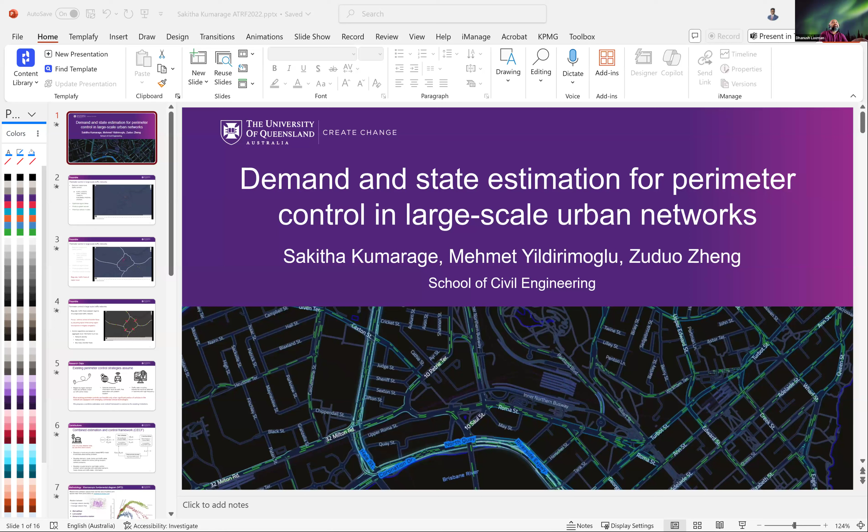Right. Can you see my screen? Not in the presenter mode. We could see your presentation. All right. I think it's correct now.

So today I'm going to talk about one of the components of my PhD, where my PhD is mainly focused on demand estimation for large-scale traffic networks. In this PhD, I focused on one component for today's presentation, which is demand and state estimation for perimeter controls in large-scale urban networks, which I will go into in detail soon. This is a combined work of myself and my supervisors, Dr. Mehmet Yildirimoglu and Professor Zuduo Zheng.

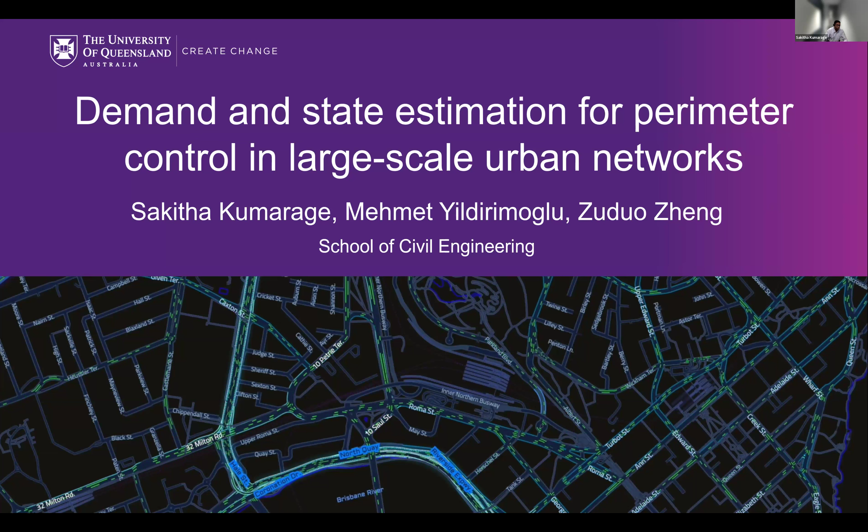So we are talking about controlling traffic in a large-scale traffic network. Let's say, as shown in this video, which is a large network of Brisbane, you will see vehicle flows from different origins and different destinations. In this case, it's focused mainly on Brisbane, but it could be a city which can go to different locations. And when you have such a vast number of different ODs and different travel patterns, there is a concept called demand responsive traffic control, which tries to control traffic networks based on the demand you get along road links and along the network.

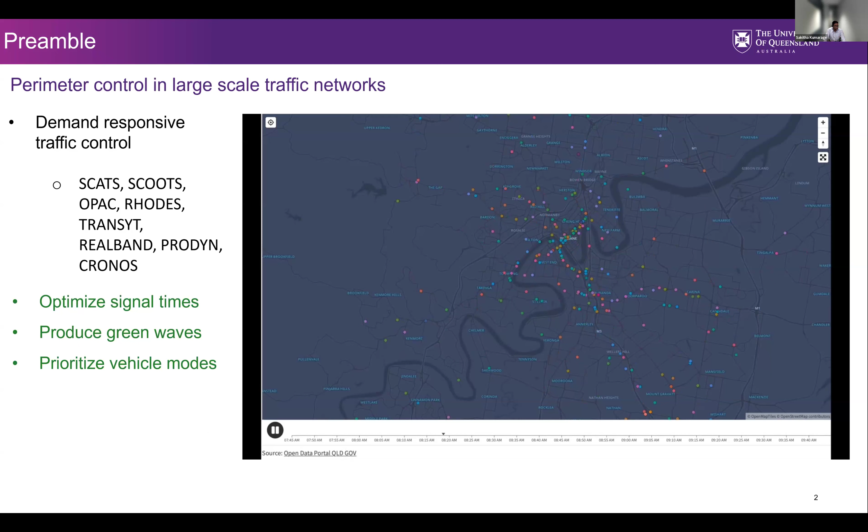What it focuses on is to optimize signal times and produce green waves or prioritize vehicle modes and so on. There are many examples where this type of demand-based traffic control is happening, and SCATS is one very close to us in Australia and New Zealand, because we have many intersections that operate based on demand, which could be corridor level, intersection level, or region level operations. In addition, there are some others as well, SCOOT, OPAC, and so on, which I'm not going into detail today.

So the target today, in this piece of work, is to regulate traffic flows at region level. In the earlier picture, you saw that it looks into all of them. Instead, now we identify certain regions in the network and control them based on the demand in that region. For example, the middle region here has more vehicles, so it has high demand for utilization, and we control the vehicle accumulation in this region more carefully than other regions. So let's look at how we do that.

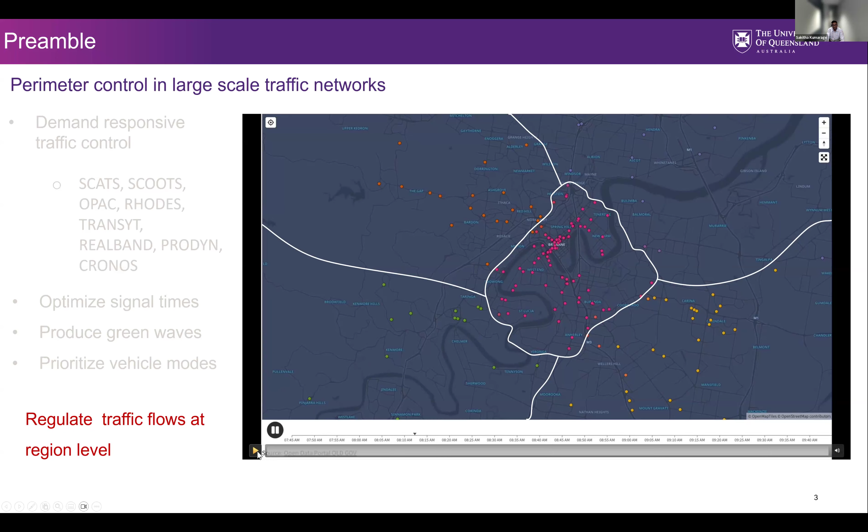So the concept or main process is, we identify a region and we try to identify the traffic controllers along the perimeter of this network. So there could be several traffic controls or traffic lights or intersections along this perimeter, and we try to control them such that vehicle flows from one region to another region is maintained at the optimum level.

So the vehicle flows shown in this red arrow are known as transfer flows, because they transfer from one region to another region, so that our signal times along these region boundaries are such that vehicle accumulations in the most important region are protected, so that the highly congested region will not go into gridlock conditions or so on.

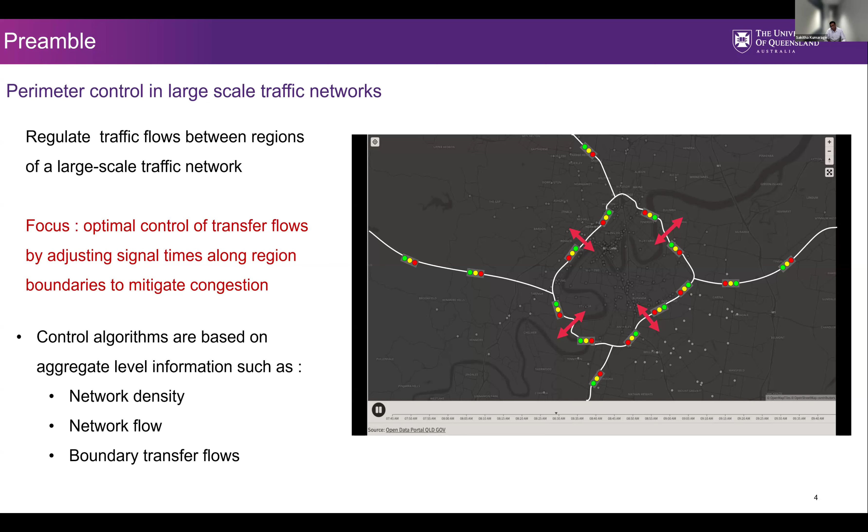There are so many control algorithms available for this, such as controlling the network density, controlling the network flow, and trying to control the boundary or transfer flows. Today's presentation is mainly focusing on boundary transfer flows, and we'll go into detail now.

So there are existing boundary control strategies, or perimeter control strategies we call them, because we control the perimeter of that region, which require some information, such as region to region flows being perfectly known. That means before we execute the control action, we assume that we know how many vehicles will be moving from one region to another region. That is not the exact scenario in the current context.

And in addition, the literature assumes that vehicles share trip information such as their path or route or final destination and their current location. Most of the available literature assumes that vehicles are equipped with GPS detectors or some form of that, which can get this data. And then traffic data, including trajectory data, could be obtained in real time with high frequencies.

Another assumption we have in current existing control methods or algorithms. However, this data is not that available, or it's not very practical to assume that we have all this information, because one, the data may not be available at that high resolution. The other one is it could be very complex to control in real time with that type of data coming in and trying to process them together.

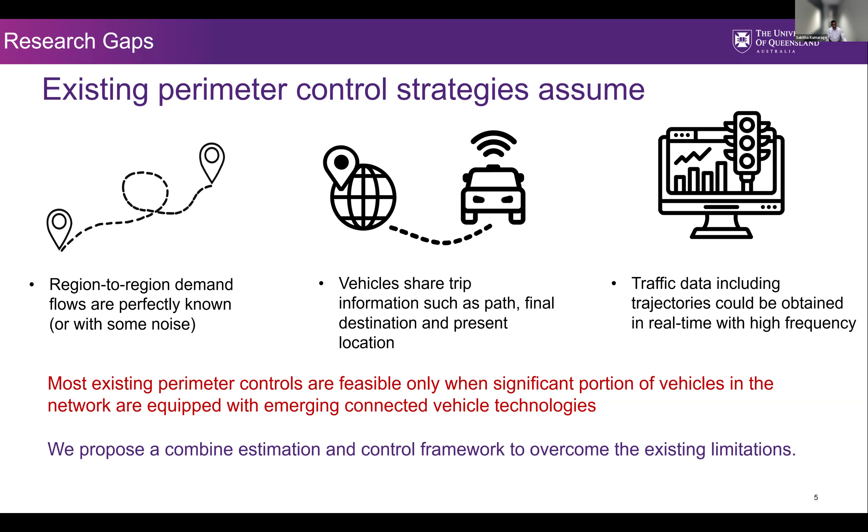So what we do in this research is to develop a method which only uses loop detector data and only uses real-time observations, which means every 2 seconds observations. And thereby we propose a network accumulation based macroscopic fundamental diagram model, which I will go into details shortly. And we develop a demand, route choice and traffic state estimation method in real time, which is given by a moving horizon estimator.

And then we develop a controller, which is a model predictive controller, to try to control the traffic lights along the boundary. And this is done in a repetitive manner so that we keep this control online, or real time.

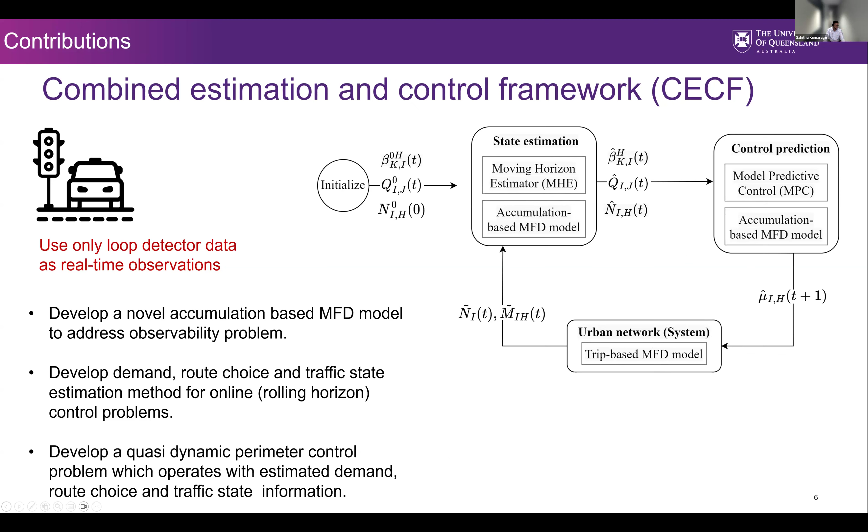So I mentioned something about a macroscopic fundamental diagram earlier. So what is the macroscopic fundamental diagram? In fundamentals of traffic theory, we call a fundamental diagram that which tries to find the relationship between flow and density. But the same thing could be expanded to a network level where we try to understand the network flow versus network density.

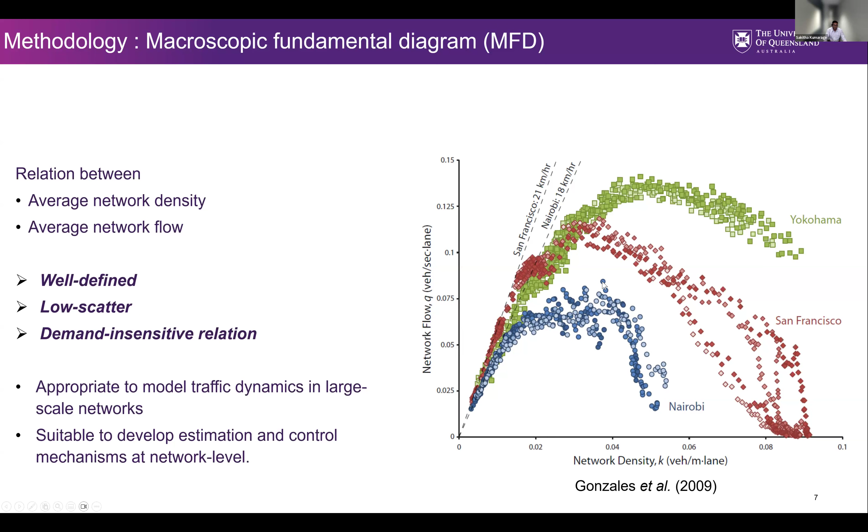In this study, we developed the controller based on the macroscopic fundamental diagram which I just explained. So here we define a region and it has an average network density and average network flow. When you measure these, you can define a nice function.

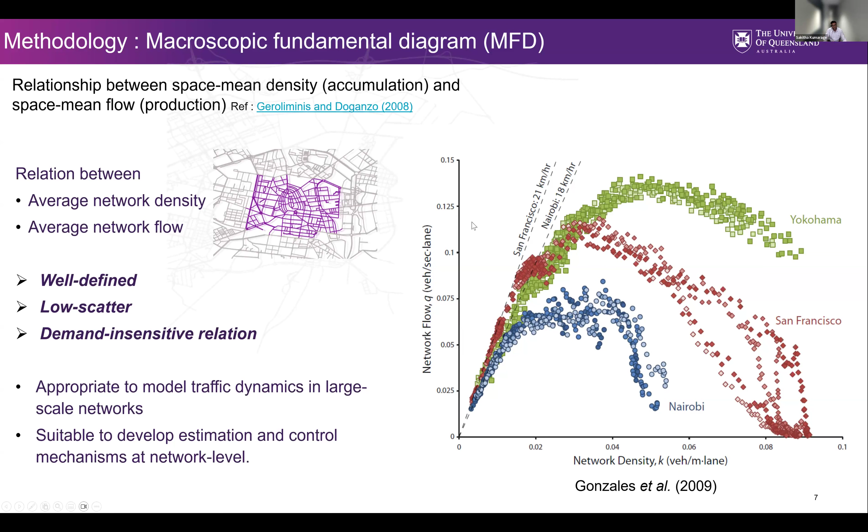Right, so then let's go to the methodology, what happens in the traffic model. So when you have several regions and you have a fundamental diagram or mathematical relation to define network flow and network density, the network flow in between these regions is similar to a reservoir system, where instead of water moving from one reservoir to another reservoir, here traffic flows from one region to another region.

And then we can find more details of the regions, such as vehicle flows, and the rate of flow could be defined based on the continuity equation, similar to water flow, by using inflows and outflows. And then there are a few other parameters that we use, such as average trip length and route choice. A reservoir is not something that complex, but in vehicle flows, we need to understand what route these vehicles are going to take.

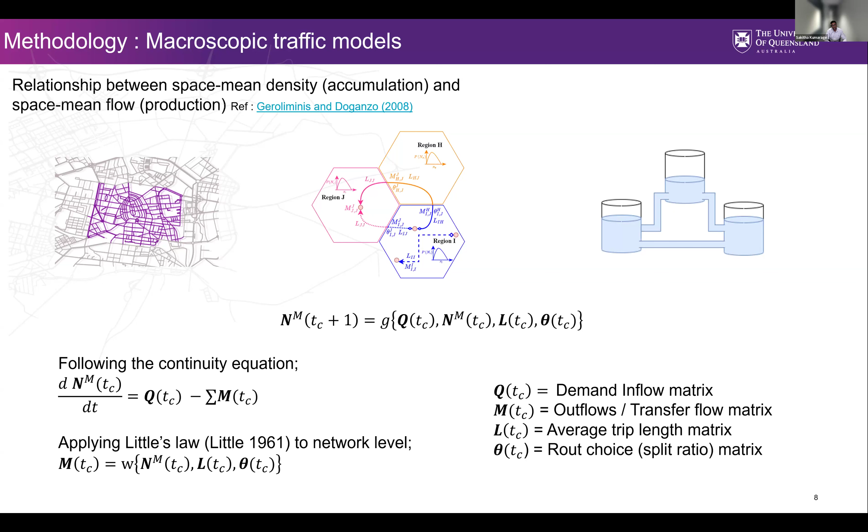And when you have such data being developed, what we try to define is a traffic dynamic without incorporating the destination region, which means we don't care where the vehicle goes as the final destination.

We only care about what is the previous region, what would be the next region. So that's the information that we're going to have, and that is something which we can extract from the detector data or based on the route choices available from historical data. And based on that, we define the accumulation of a region given by this equation, which I'm not going into detail. What it simply does is extending the continuity equation to a region level traffic dynamics.

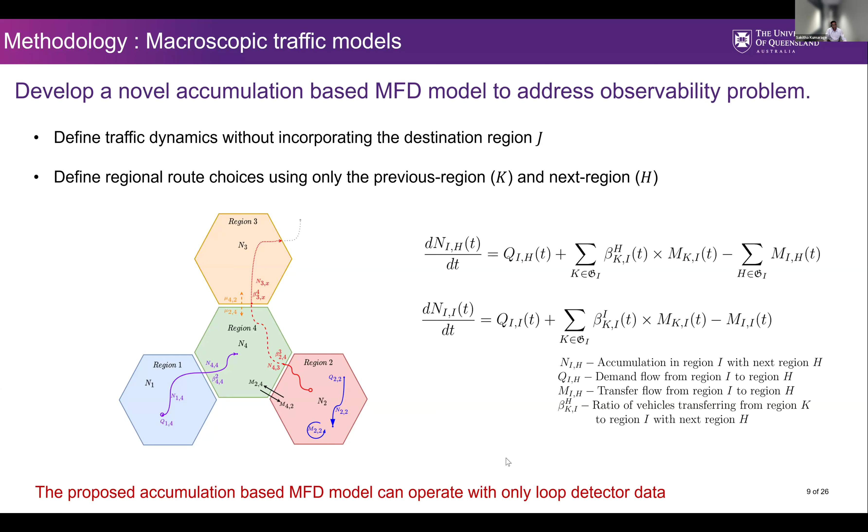And then this is the estimation part here, where we try to estimate the traffic dynamics. We try to estimate the demand and route choice as a combined approach, where we develop an optimization problem where we say we can observe the outflows, and based on the MFD we can get the estimate for the outflows. And what we try to do in this process is to minimize the difference between estimated values and actual value.

Again, it's similar to any minimization problem, but in addition to that estimation problem, we have some constraints defined by the macroscopic fundamental diagram, which is the network level traffic information, and then the region level accumulation levels, which gives us the regional traffic information. And then we try to provide some limits to the demand based on the prehistorical information we have. And then we define regional route choice as well, and we bound that regional route choice to certain boundaries. Again, that is coming from historical information, which is a static constraint.

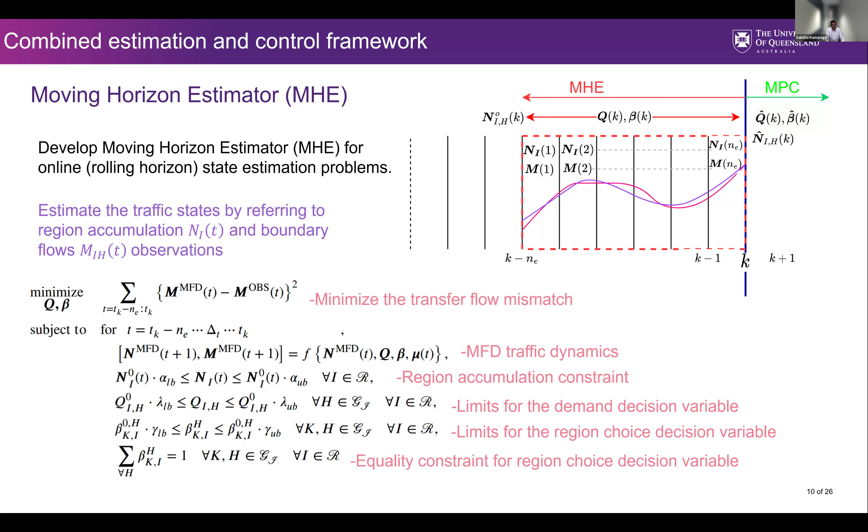And then when you run this optimization problem, you can estimate what's the outflow in the very next time period. And we use that to control the traffic network in the following time period. So the next is the model predictive controller, which tries to control the traffic network based on the estimates we got from the previous method.

And that's again a minimization problem which targets to minimize the total vehicle accumulation in the network. How do you do the minimization? If you want to minimize the number of vehicles in a given region, you have to minimize the number of vehicles entering and maximize the number of vehicles exiting. So to do that, the main control input is what data we have in the traffic controllers.

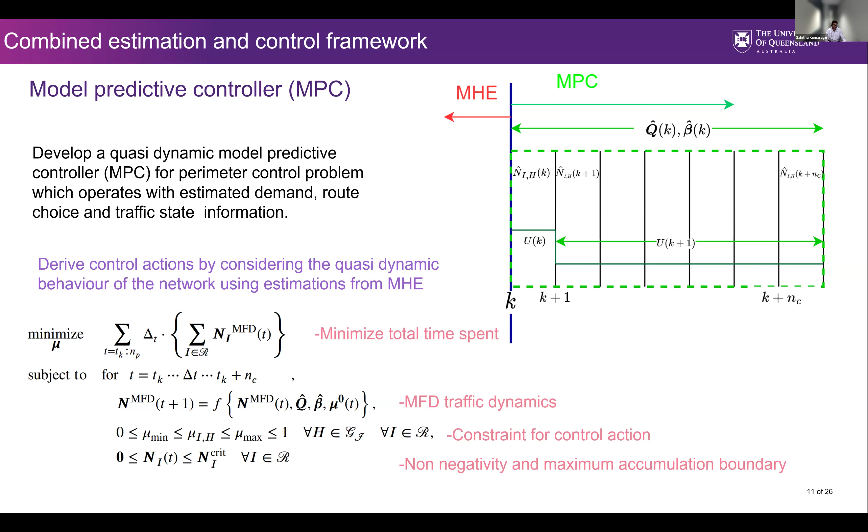And given now all the traffic controllers are connected, we define a universal controller called U(k) for the current time period, which says, okay, we try to reduce the vehicle flows in these traffic lights, or we increase the vehicle flows. Ideally it will convert into the green time or red time that we allow in any of these traffic lights. So that's the simple concept behind this method.

And I have done some numerical simulation focusing on different demand scenarios where we try to understand the performance of this estimator and traffic controller in demand conditions, where you will have an observed demand, and then you will have a variation to the observed demand by up to 25% underestimation or overestimation.

So the final understanding coming from this analysis is you don't necessarily need to have all the information to control the region. Instead, you can have some information taken from loop detectors and devise them mathematically, run an optimization, which is a simple optimization. And based on that simple optimization, you can control the traffic lights along the boundary such that more favorable, less congested conditions could be achieved.

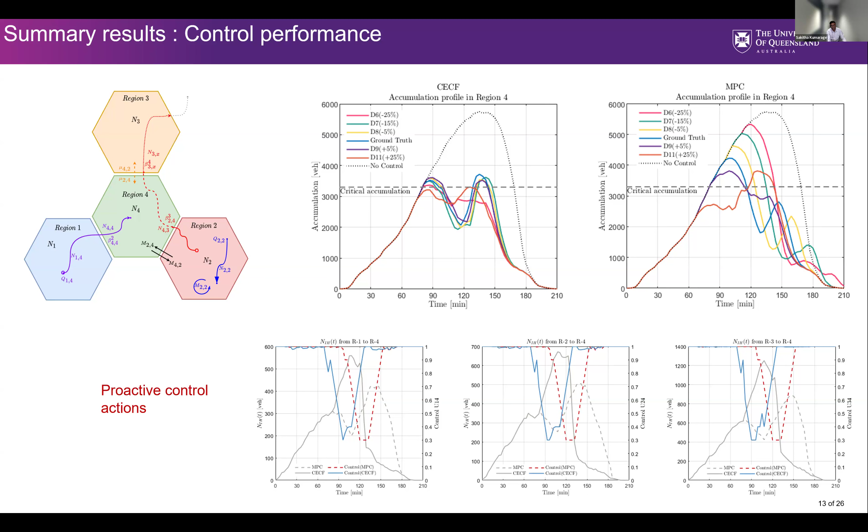Right, and then again, these are results about the demand estimation. So given that we change the estimated demand from underestimated by 25% to overestimated by 25%, with the information we have, what the results say is we can reach an adequate estimate to control the network.

We will not be able to estimate the network to the 100% level, but the estimation results that we get are adequate enough to control the network and maintain less congested conditions in the traffic network. So the combined approach of estimation and control is not necessarily to achieve perfect estimation or perfect control, but to reach a hybrid point where we can execute a control algorithm practically with the available information.

So let me summarize what we did in this research. We developed a hybrid estimation and control mechanism where we try to operate a large-scale traffic control mechanism without high resolution data from traffic networks such as trajectory data or GPS points. We only use loop detector data taken from the network, and to do that we developed a moving horizon estimator, which is a nonlinear estimation method, and then we developed a model predictive controller to control the traffic networks.

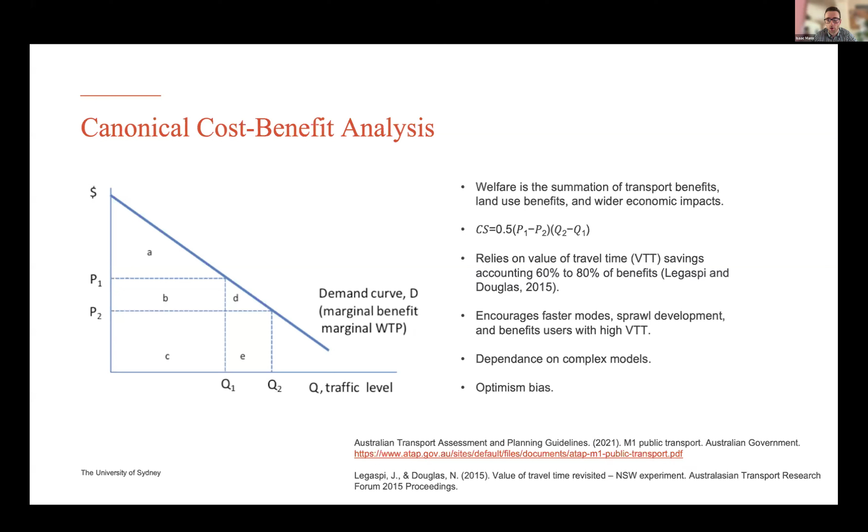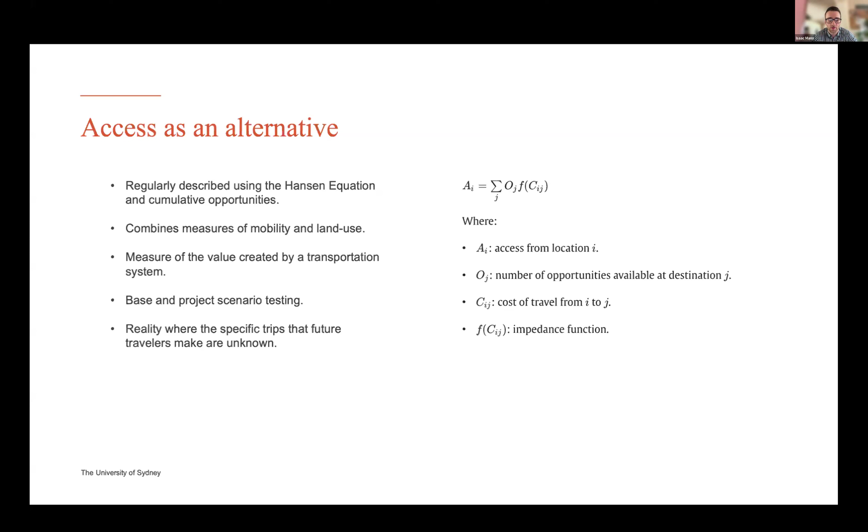This combines measures of mobility and land use. It can measure the value that a transport system offers. It can be tested in base and project scenarios. And importantly is this last point, where it reflects the reality that the specific trips future travelers make are actually unknown.

So this is somewhat discussed in literature. The current studies generally fall short of cost-benefit analysis implementation, and to be fair, that's not really their intention. And also inconsistent measures of access. So it's often measured as a proximity to a railway station, for instance, not so much the amount of opportunities that you would have access to.

So following a literature review, we defined these thesis objectives. The first one is to replace a typical travel cost or direct transport benefits in conventional CBA to avoid the same issues with it, but importantly to avoid double counting. The next is to monetize access. So access is a non-market good. We need to develop a sort of a process to convert that to a dollar figure. And the last objective is to offer a reproducible methodology.

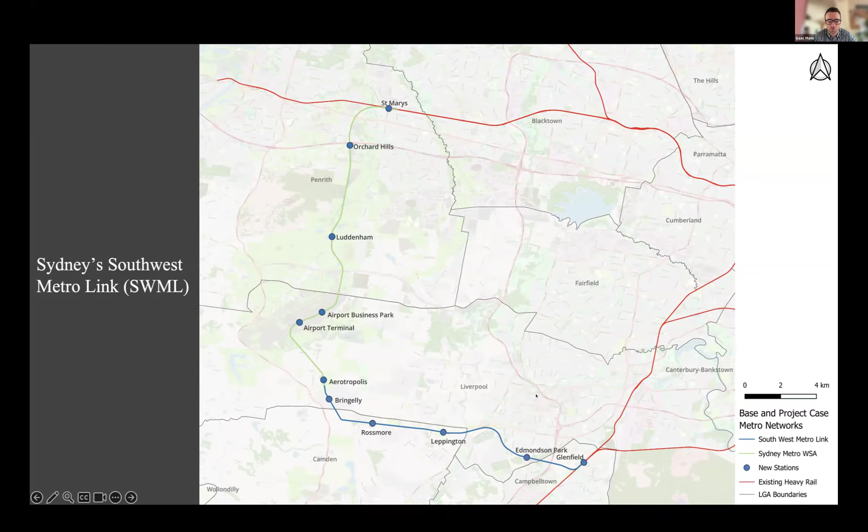So the method involved 3 major steps. First was to develop a hedonic price model of Sydney. The next was to compare before and after project scenarios for the Southwest Metrolink. And the last was to perform cost-benefit analysis.

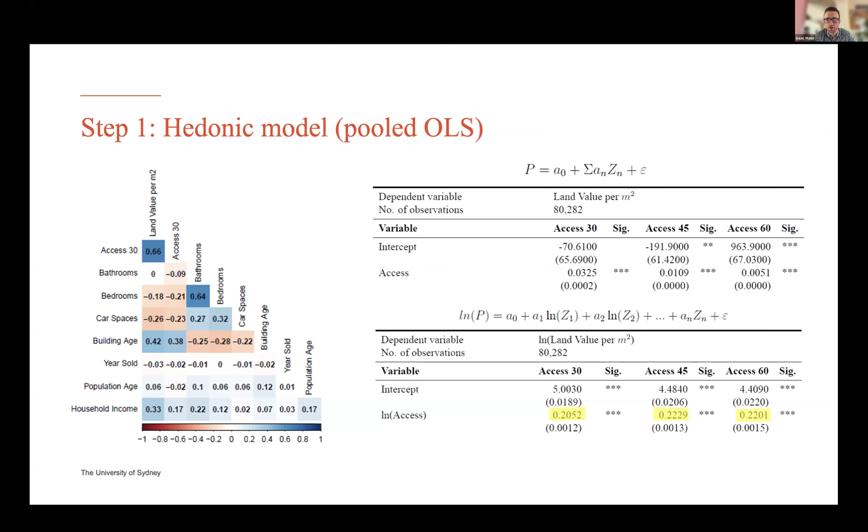So some results of the hedonic price model are shown on screen. You can see the correlations matrix between access, land value, and other inputted variables. We ran linear and log-log OLS models. So the top halves of the tables are shown here. I think the interesting results here are highlighted. These are elasticities. So these are essentially saying per 1% increase in accessibility that a property has access to, we see about a 0.2% increase in land value per meter square. So these results become valuable for the cost-benefit analysis process.

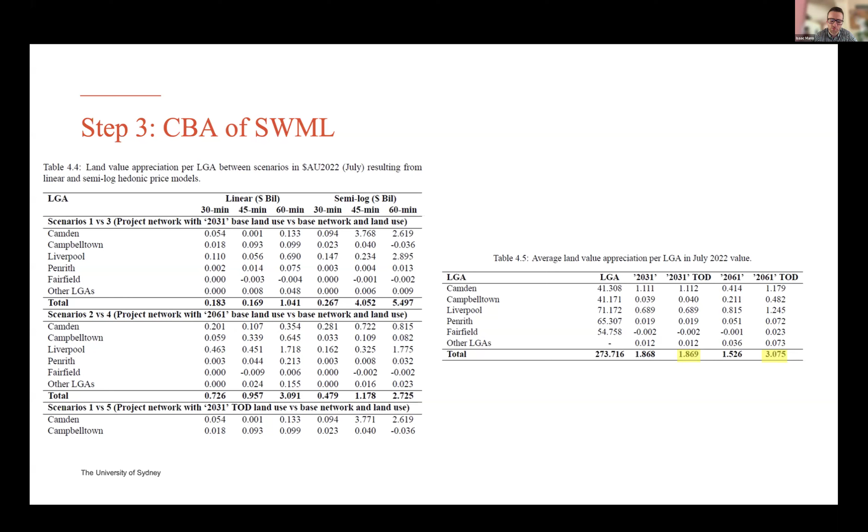We've got the 2031 benefits offered by the project are around 1.8 billion versus the 2061, which is around 3 billion. Interestingly, the 2061 base land use scenario is lower than the 2031 benefits. And that's demonstrating that access follows the law of diminishing marginal utility. As the peripheral network develops, access becomes more abundant and less value is actually offered by the project. That's offset in the TOD scenario.

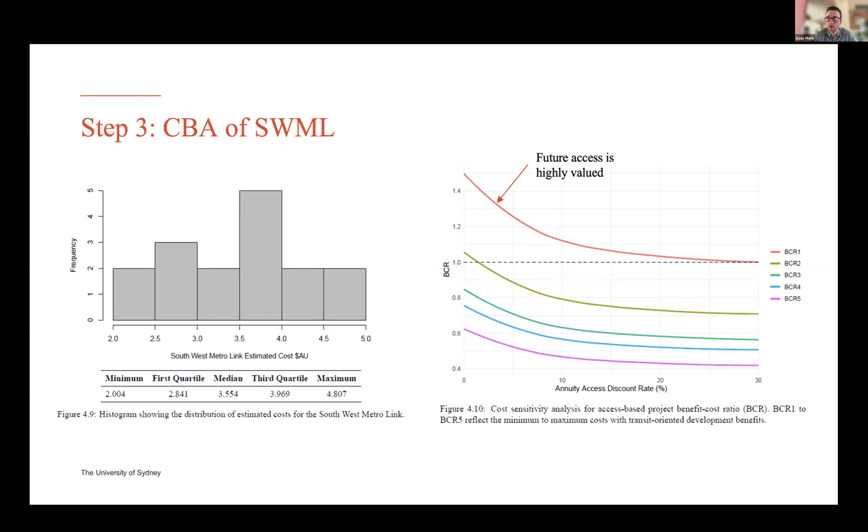So here's a summary of the results. Our hedonic regression shows around a 0.2% increase in land value per square meter per 1% increase in job accessibility. That's a linear rate for the linear hedonic price model. Project benefits are around 1.8 billion in 2031 and between 1.5 and 3 billion in 2061.

Strategic costing reveals a range between 2 to 5 billion. So we conclude that our BCR is greater than 1 in terms of land use benefits if there's TOD development, project costs are minimal, and future access is valued highly in the present.

So the implications for this research, well, firstly, it's an alternative method of cost-benefit analysis. It doesn't have strong dependence on value of travel time savings and the corresponding complex travel demand models associated with that. It has direct application in value capture strategy. After all, we are looking at property premiums that would be generated by the project.

Tractability: it's easily reproducible. It relies on minimal computational power. And the idea of that is to improve its reproducibility and transparency in the business case. And importantly, it establishes avenues for further research, so looking at how it interacts with land use transport integration modeling, wider economic benefits, alternate methods of hedonic regression, such as spatial models and different types of panel models.

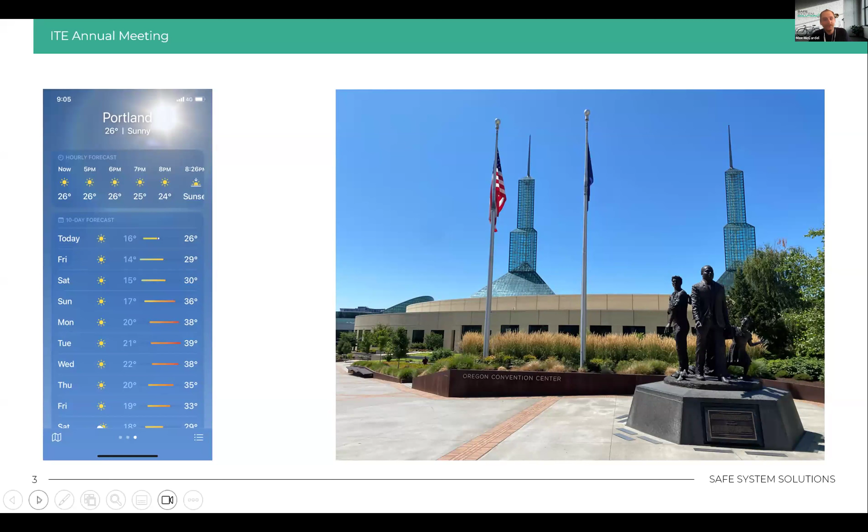And we were lucky enough to have some incredibly warm weather, nearly 40 degrees every day. And I kept being told how unseasonably warm that was. So that was a nice thing to arrive to.

I am an early riser, so this is before anything got started, but when there were discussions being held, every single seat was filled and there were people standing, because it's just such a big event, these annual meetings, and the speakers were very prominent in their field. So there were lots of good discussions being held.

There was a myriad of exhibitors as well, plenty of opportunities over lunch and morning tea breaks to head around and have a chat to different providers, and not just because they're trying to sell their products, but they were very interested as to why an Australian was there and where I got that accent from. And they were incredibly friendly, and that then led on to networking events and other social activities outside of the conference. So it's really exciting to have that opportunity to engage with professionals from another jurisdiction.

One of my favorite workshops was the Safe Systems Solutions in Highway Safety Improvement Projects. This was actually on the Sunday before the conference. I was really excited for this because I work for the company Safe System Solutions, so I knew it'd be incredibly relevant. And indeed, it was basically a workshop discussing what we would refer to as safe system assessments.

He's always been passionate about active transport in Portland, and he's been advocating for a pedestrian and cycling link into the downtown area for many years. And he's kind of championed this bridge. So this bridge is actually not open to any motor vehicle traffic. It's only for people walking or riding their bike. No vehicle access whatsoever.

However, they had the foresight of building the bridge to be able to withstand high-magnitude earthquakes, because where Oregon and Portland is, it's actually adjacent to the Cascadia subduction zone. And they haven't had a significant earthquake since the 1700s. By significant, I mean greater than 9 magnitude. In the next 50 years, though, they are expecting something of that magnitude to occur. And when that does happen, not only will it be the shaking of the ground, but there will also be a tsunami occurring.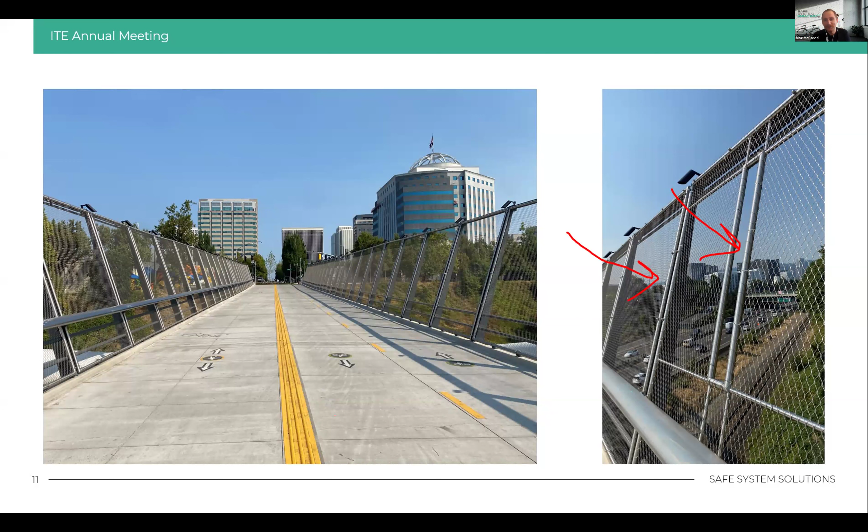So Earl Blumenauer, he's got this lovely plaque in recognition of his contribution for leading this development of the bridge. But I also really liked a nice little touch, the bicycle symbols adjacent the bridge. They've included his signature bow tie because he's famous for wearing the bow tie, and so those stencil pavement markings, they've included a bow tie. Very lovely little reminder of, I guess, the successful advocate for this project.

I've gone through it quite quickly, but I probably could have taken more time. I really enjoyed not just the conference aspect or the annual meeting side of things, but tacked on a few extra days and did some cycling around Portland. Portland for me has always been the #1 destination in the US. I've always wanted to go to Portland because of their cycling prowess. They're known as the best city in the US for cycling connectivity. So I've always wanted to go and ride my bike, and this opportunity gave me that experience.

So I did hire a bicycle, and I got to see a lot of the trails, a lot of the cycling improvements and networks that they've achieved over the years. So Portland has been, since the 90s, really trying to advocate for better cycling safety and networks across their jurisdiction, and it is very much a cycling city now. So it was wonderful for me to be able to go out and ride through those networks, both as a professional development experience and also as a bucket list thing. So it was a wonderful opportunity for me.